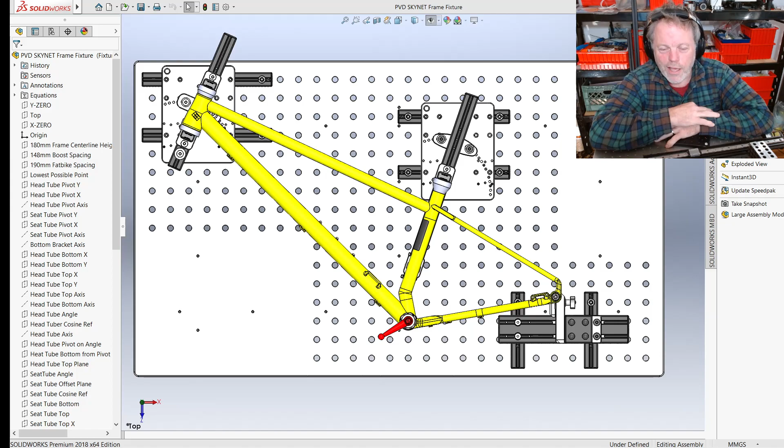You start getting a different perspective than an influencer on YouTube or some guy on a message board that professes to be some kind of expert. So when I was convinced to redesign the Cyberdyne in a way that maximized the ability for, let's say, perfect example is a high school kid with maybe some access to a manual mill and manual lathe and not very much experience using those tools and not a lot of money, which in a way could describe almost every budding frame builder.

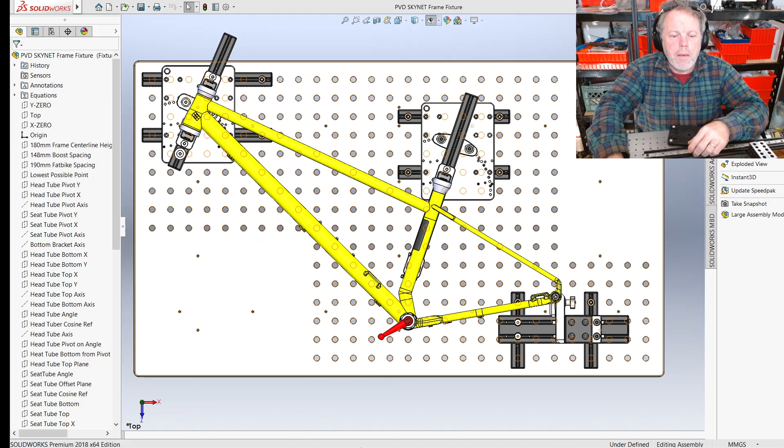And so how would we solve those problems in a similar way? Well, my general advice in the current era for anybody is invest in a welding table, a proper fixturable welding table. It is by far one of the best ways to spend your money if you're looking at entering in this world, just because it can be leveraged so powerfully in so many different ways and it's extendable in so many different ways. So that's a real wise place to spend a lot of money. But a lot of people can't do that, and I get it.

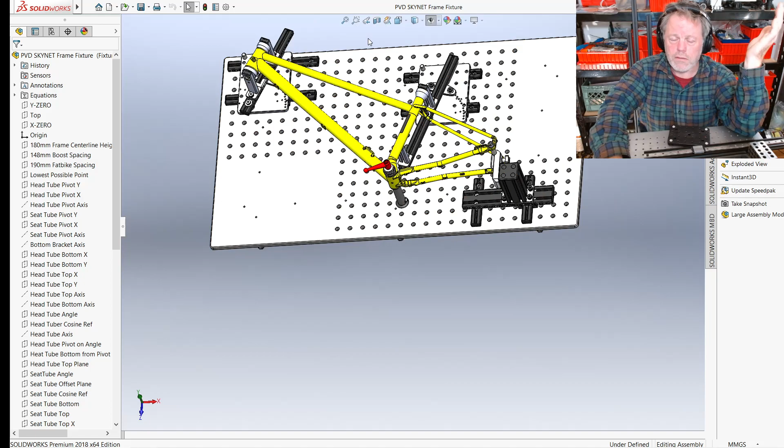But what they might have access to is a wood shop or a sheet of MDF from Home Depot, and they can make a torsion box with MDF. Here's some 3/4 MDF, and it's been cut with a raster, let's say on a CNC router table, which those are fairly common in small towns even. Maybe you got to do a favor, get access to one, but you could lay this out and do this by hand, and it would still be pretty darn good compared to some other fixtures. Just some basic cutting of wood and gluing together will produce an approximate equivalent welding fixture if you're broke.

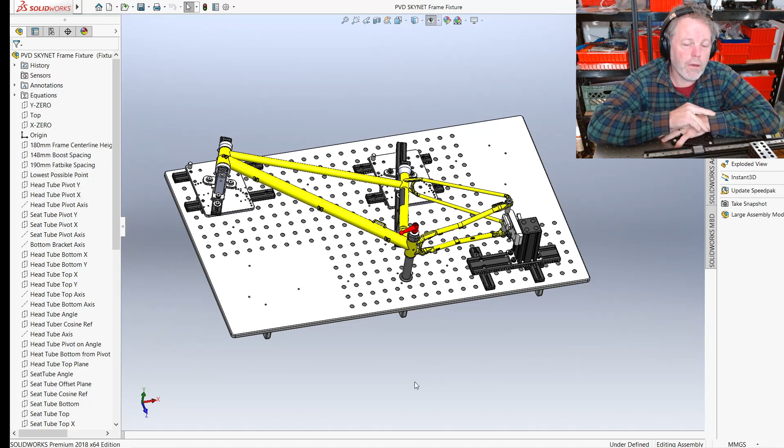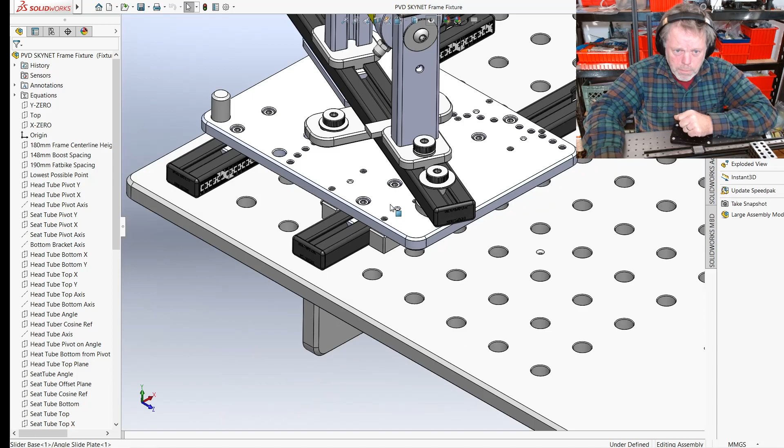Okay. Now, I did this after the Cyberdyne, so I'd learned a few things. One of them was I wanted to get away from the pinning out of the positioning. I wanted to slide. So, of course, we go to 80/20 first, and we like 80/20 because that's exactly what it does well. But if we're going to bolt down some 80/20, we need a way to position it. Let's open up this rail here. Perfect example.

Are we recording? Yep, we're recording.

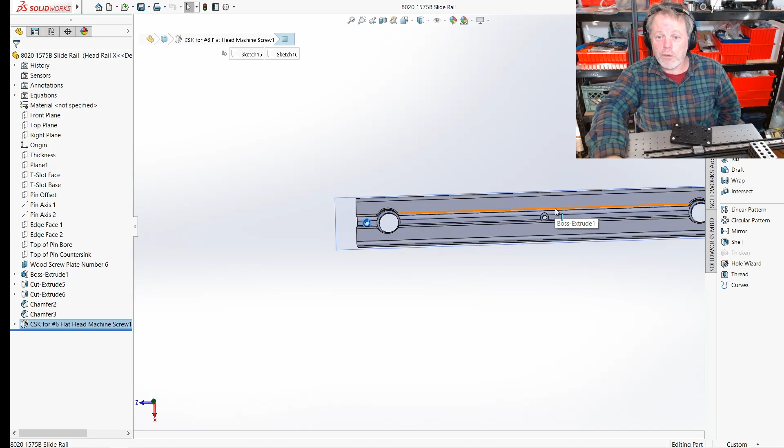Okay. So if you notice here, I have wood screw holes. So if you're just going to be gangster AF, you could just cut some 80/20, put some wood screws in there. You clamp this thing in position and you double, triple check that it's confirmed and it's good. You can just screw this down and boom, you're done.

In fact, you could do it with a whole length and do your seat tube and your head tube with one bar each, so that was effectively going to be your horizontal datum. And that's one way to quickly fab in some just dead nuts precision. But be careful. But it can be done. And so then you don't even have to do the raster.

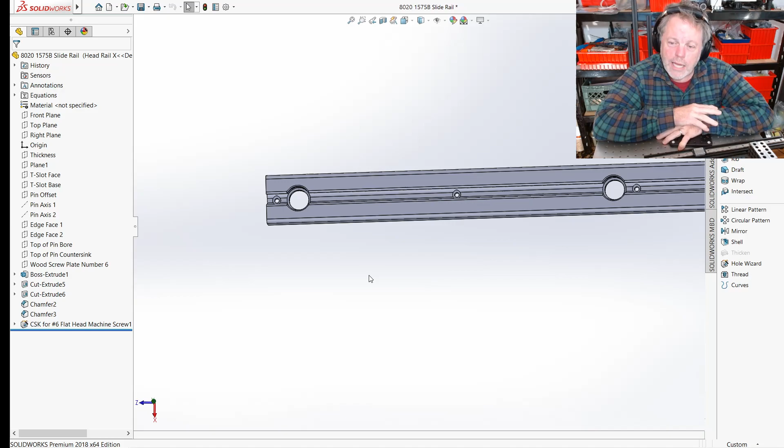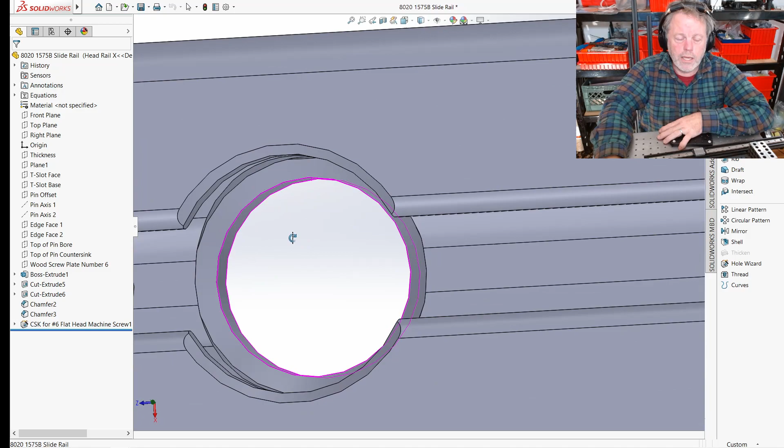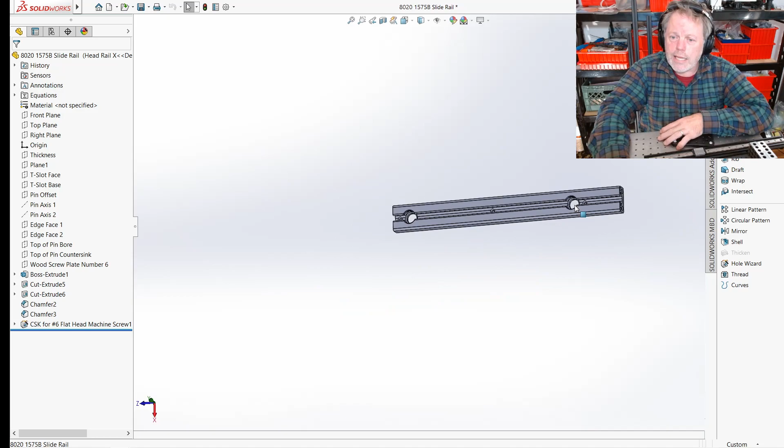You can just bolt up a few rails and a hole for the bottom bracket. You've got yourself a frame fixture with some 80/20. But anyway, I engineered these holes into the 80/20. They're 3/4 inch diameter and 5/8 through, and they're machined with a 3/4 inch chamfering end mill. So you immediately get that 45-degree chamfer there, and that essentially replicates what the top of the welding breadboard is like. And in cahoots with those pins that I talked about, let's not change anything.

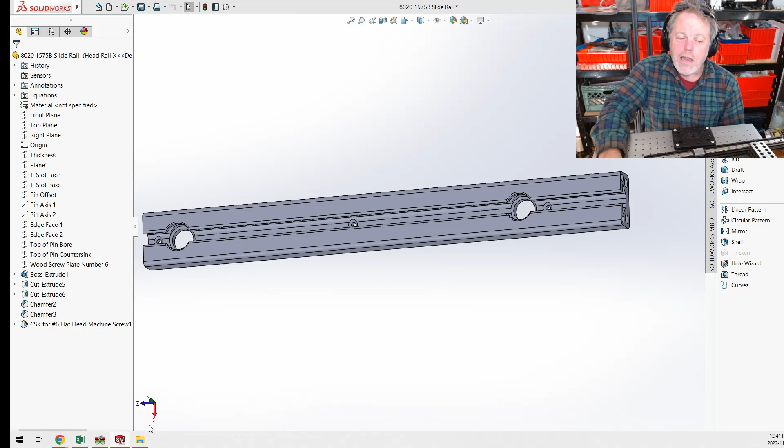Oh, by the way, the bike on this fixture currently is the MiG 31, the Firefox. That was a short-lived bike. That's where we discovered how thin you can print, or how thin you couldn't print. Anyway, it was pretty until it wasn't. What happened? Okay, there we go.

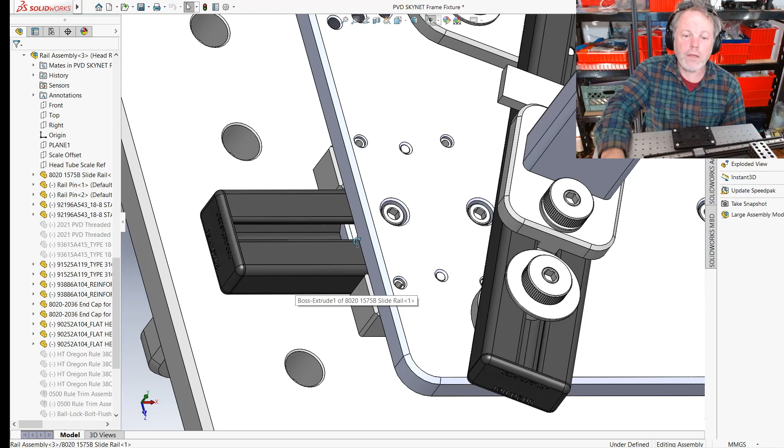So yeah, so then there's these pins that you have to make, and this is the fussier part of this construction. Where is it? Oh, it's on this side. Come on. Oh, they're on the rail assembly. Let's get into the rail assembly. There we go. That's how we should have done this from the start. Just open up a rail assembly. Okay, there we go. Much better. So yeah, there you go. You can see the wood screws, all great.

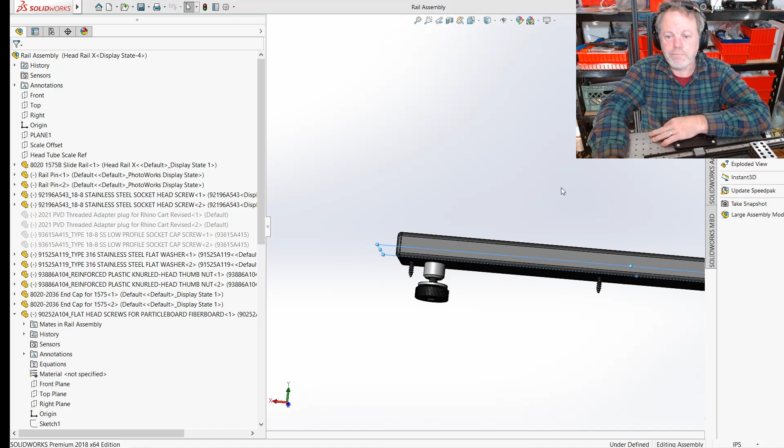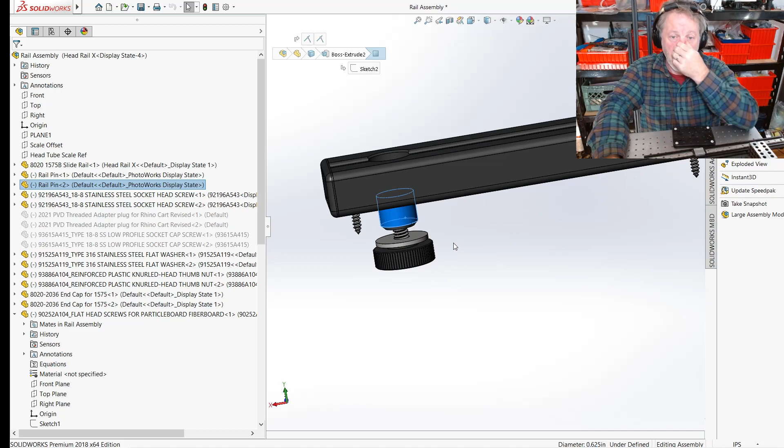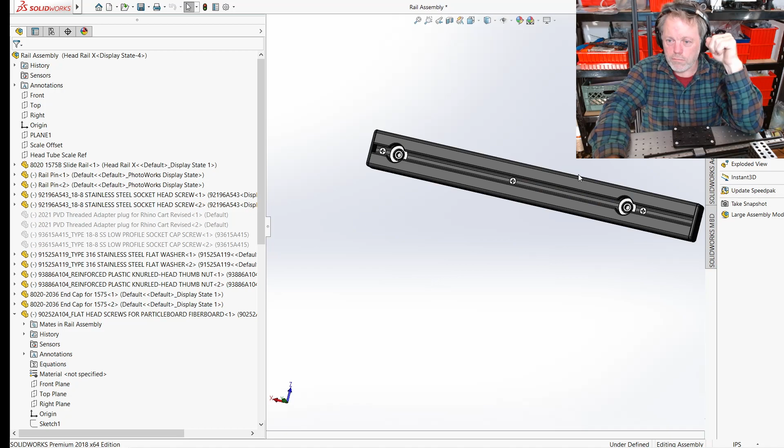But then if you're using a raster, if you're using a weld table or you've made a raster on an MDF torsion box, you can get these pins made, which you can make on a manual mill. They're not too hard to make. I mean, sorry, on a manual lathe. And it's just a countersunk for that. It bolts that down, and you can move that around anywhere on a breadboard now. So that's probably the toughest thing about this fixture, is getting these pins made, which I don't think is too hard. And also people could group together to make pins, that kind of thing.

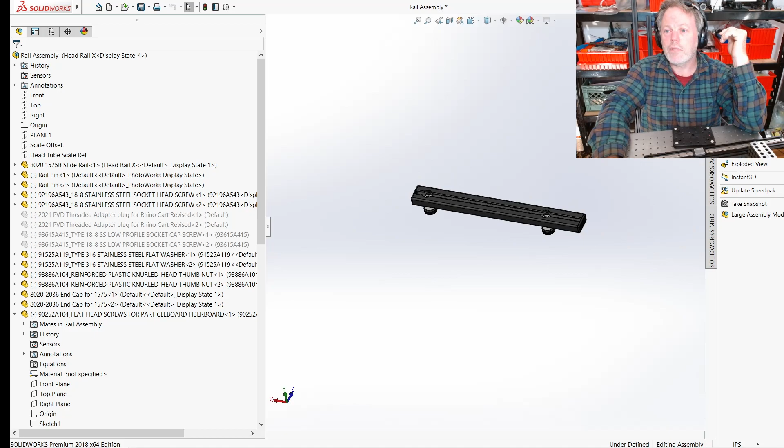But you can also see, boom, screwed down some screws, and these are special screws for particle board. What is it? This is the McMaster number down here. Flathead screws for particleboard or fiberboard. Throw some glue in there if you're going to make a permanent thing. So that's cool. I just hid that plane, so I'm gonna save it so it's just out of our hair. Love playing with the rails. Woo-hoo.

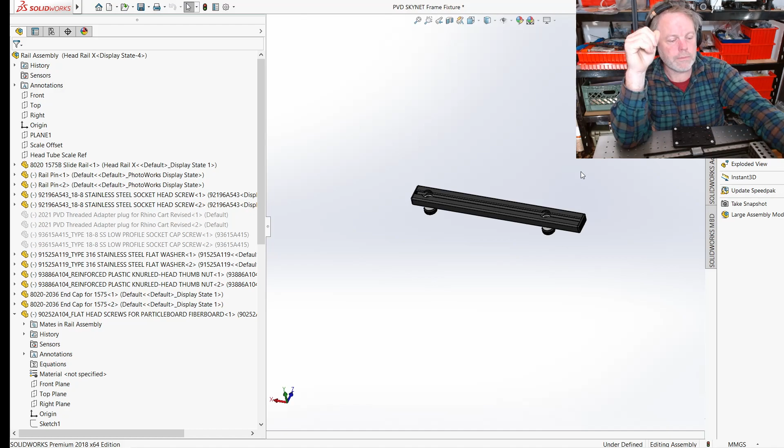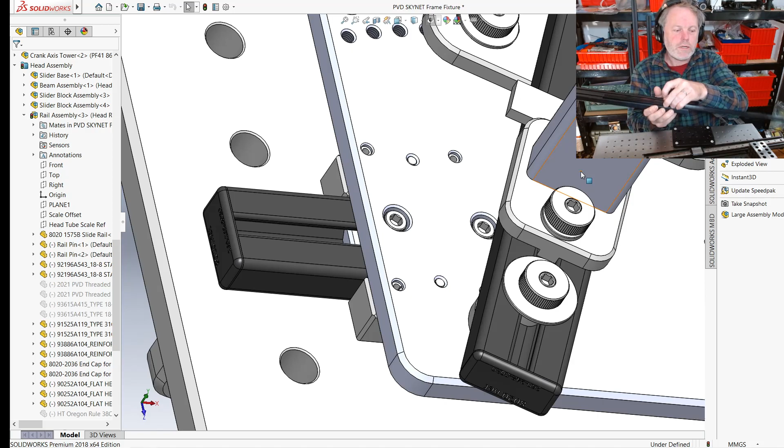So some people are going to be wise and they're going to say, hey Pete, why didn't you just use 80/20 rail stuff, motion stuff? So here's a piece of 80/20, and I like the low profile stuff. I think it's nice. You get the heavyweight stuff too. This is the bearing material that they sell with their stuff, but if you notice, it's got significant play in that. Now, worst case scenario, you could use that, but it's not that great. I mean, they have motion control parts.

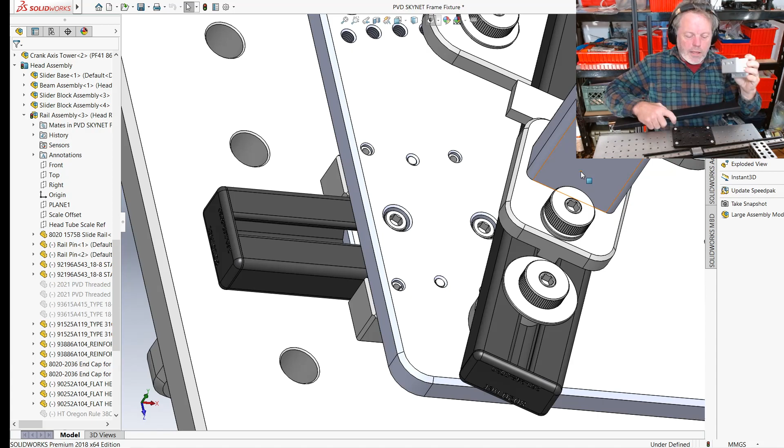There we go. So here's an 80/20 motion control type thing. But I don't believe that these produce the precision we're looking for in this environment. You could end up making something that used it, but I don't think that's wise. Anyway, so I make my own system. Let's open up this angle plate that's largely a piece of aluminum plate with a bunch of holes drilled in it.

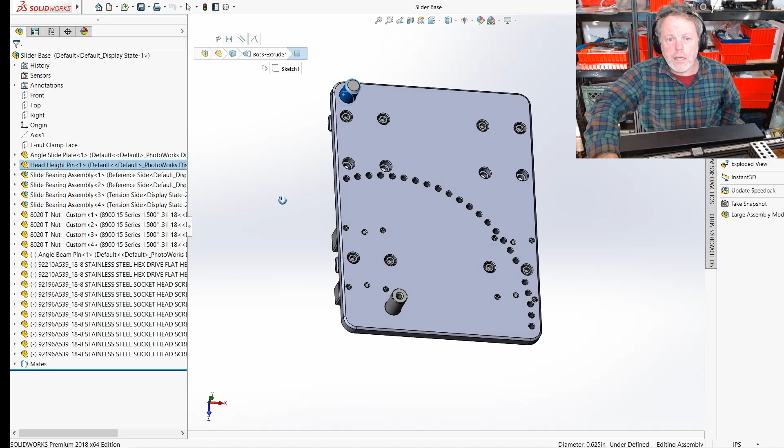Okay, there we go. So because we don't really have the thick material or the CNC stuff, we set our clamp down angle stuff down here. This isn't for precision placing, this is just for clamping. We still end up with a cosine bar made by that pin, but we're sliding along the 80/20 using these. You can get a full length of key stock. Here we go.

So you can make custom T-nuts with this. I say order length. You can get individual pieces, but if you want to stop a lot of racking, doing a pair like this is good. They sell cheap plate ones and everything like that, but if you can, make them out of the proper stuff, and you can buy these in lengths when you do your orders. Just don't forget. So that's really the right way to do that. And of course, when I made this, all the documentation was shared online for making one of these fixtures, so you can look that up.

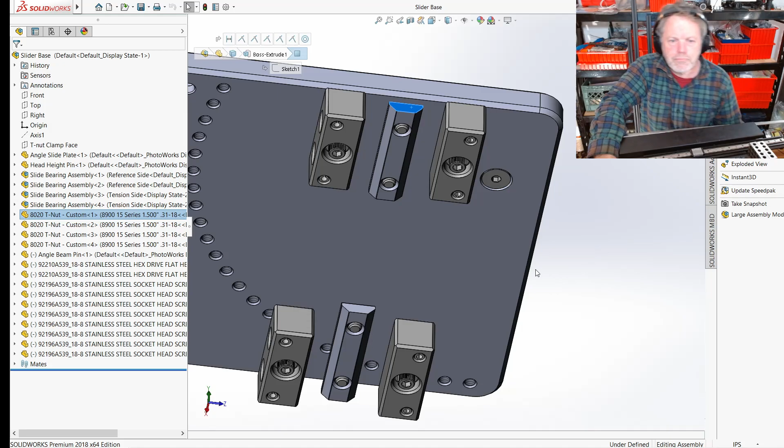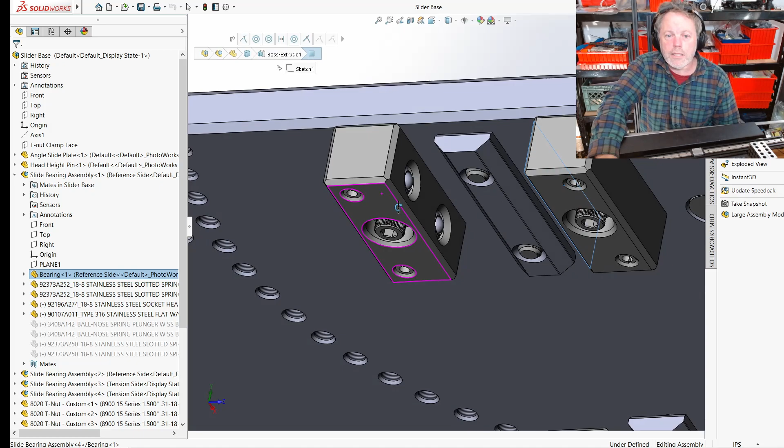Anyway, so I cut some Delrin blocks here. They get pinned in place and clamped down. And that essentially is your fixed datum of the slide. And then on this side, almost the same part, different clearance, but then you screw in a spring-loaded set screw type thing. What do they call them? Let's see for the proper name. Ball nose spring plunger with stainless steel ball.

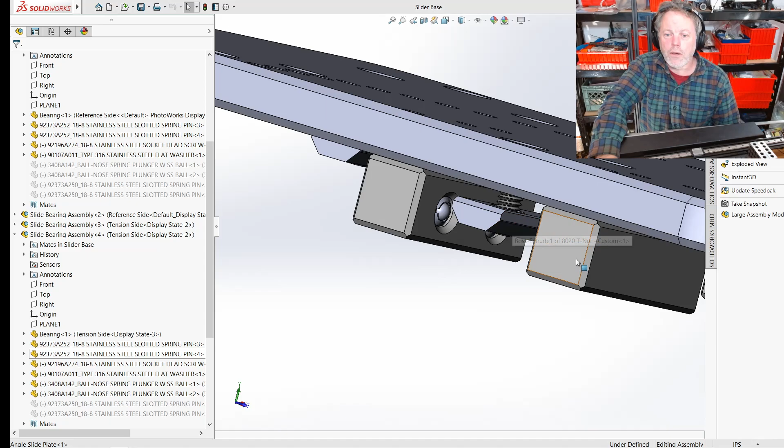So yeah, and all that's supposed to do is provide a little bit of spring tension on one side, because what we want to do is treat this face as our datum for the slide. This clamps it down, this pushes it in the other direction. Worst case scenario, if you overpower it, it bumps up against this Delrin here.

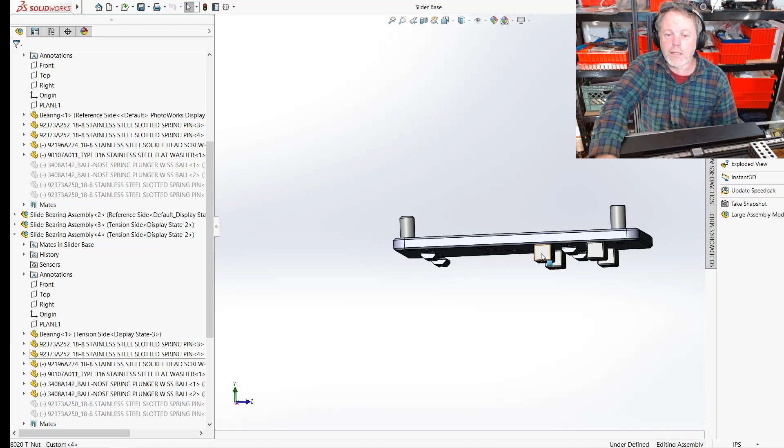Nice and slidey. Okay, and on top, we don't need that because we only need one rail to make a linear positioning, and these clamp. So super solid, and it's all nice, pretty easy to get to. Here's your pin for the pivot, just a counterbore in there, and then you're in business. So not a hard plate to make, and that was pretty cool.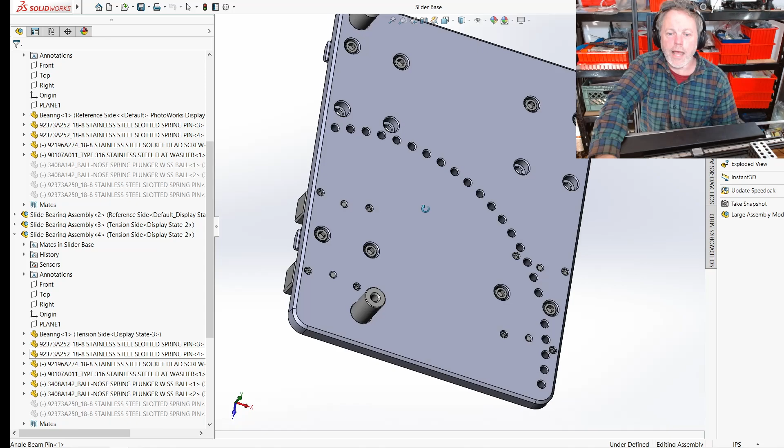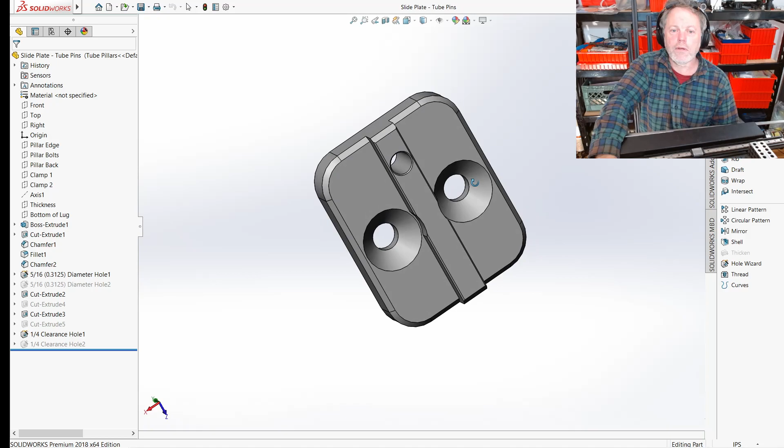I mean, it's a real job, but I think a novice could make it if they have a DRO, especially. And make a little cart for on top of the 80/20. These are fairly simple parts. The SKYNET 2 gets some really fancy versions of these because that's a different thing. Anyway, so there you go. Pretty simple way of tracking on an 80/20. There are other ways of producing precise movement on any 80/20 rail, but this is actually pretty darn good.

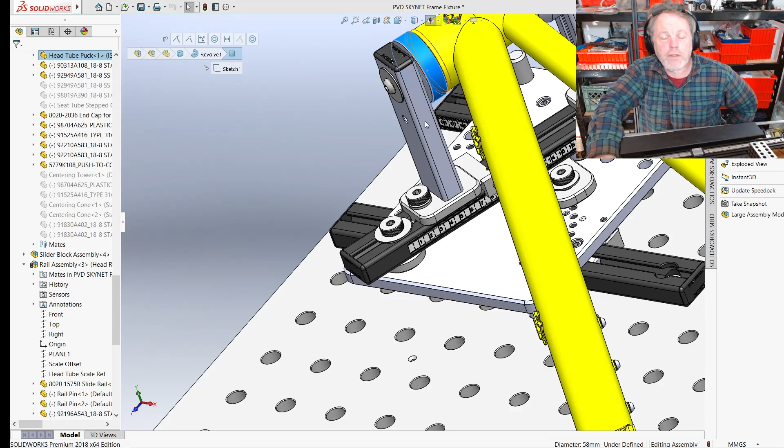And we just pin out. And of course, on this design, and this has been improved, that's the problem with this SKYNET, it is highly improved on the next one. These pins are 5/8. Remember, was it the last video I said, if you spend $1, you want to get $1.50 back, not 75 cents? If I'm going to make a puck, I want it to drop into my welding table too, not just my fixture, because there may come a point where that's a setup that I might want.

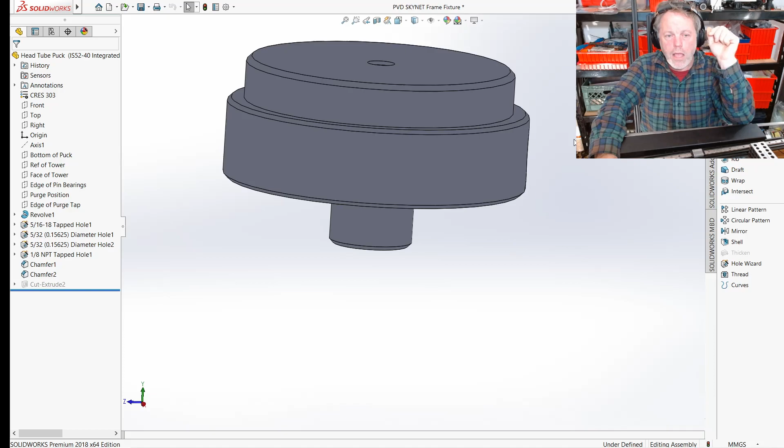So I'm looking forward to future setups of like, hey, wait, something has to hold this. Why not make it 5/8 or 16 millimeter, whatever you're working with, that's fine. But this can be used in another way, okay? And I think that's a special puck for that. Anyway, of course, I've got the rails on there, some various spacers.

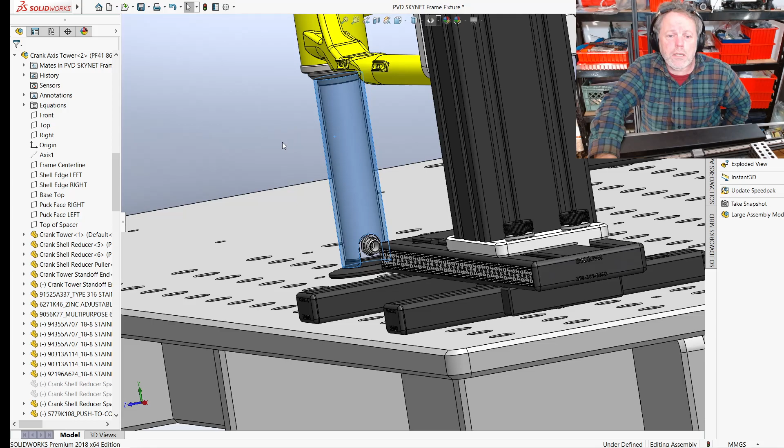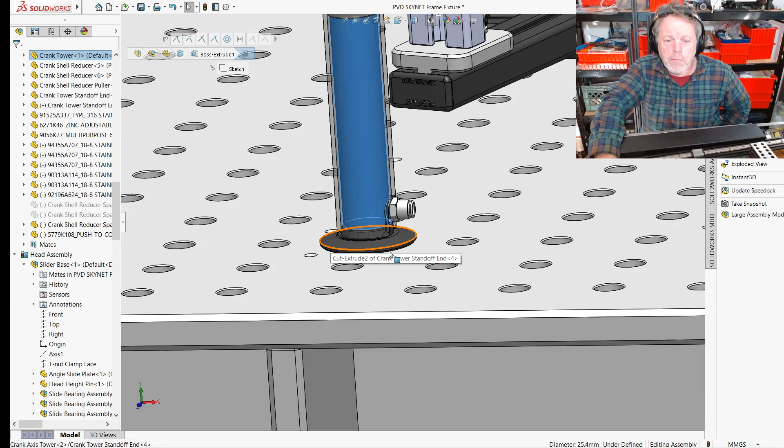It's nothing too complex. To bring the cost down and the ability to machine it, I made this multi-part standoff with some aluminum tube. Let's change the transparency. So this is aluminum tube, and it sits on, and the column itself clamps through this lower plate. Now that might seem like, why are you making it harder if you're trying to make an easy to make fixture? Well, the reason for having it sit on this is it's got a very broad base, and that spreads out the load.

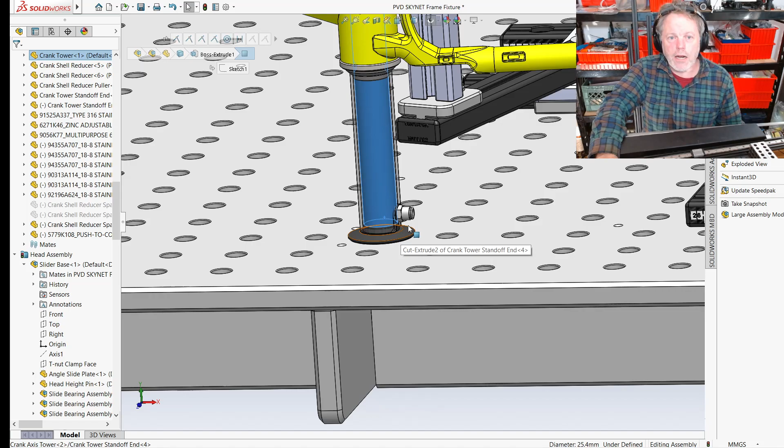So if we're using MDF, we can still end up with an extremely rigid stanchion coming off of that table, and it won't mar up the table if we start really leaning on things. Now, there are limits to what you can do with the MDF, but the whole intention here is we can bolt to a welding table or MDF, and we still have significant purchase down at the bottom. And then, of course, we step up to it.

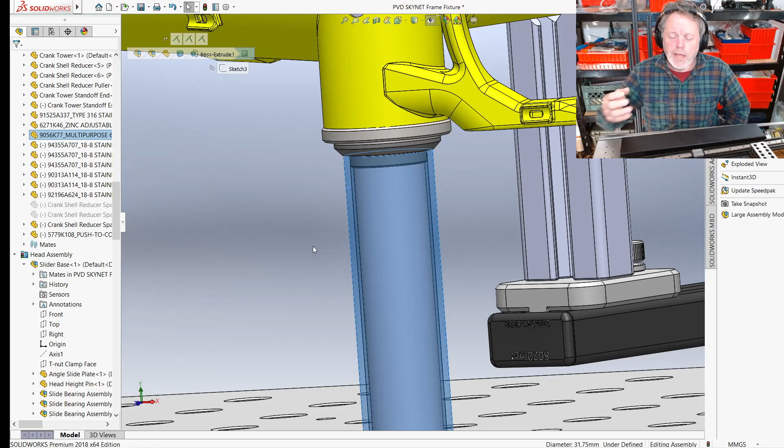But the diameter of this aluminum, and the documentation says, if you can increase the diameter, you should. It's just a lot of lathes people have in common circulation might not be able to hold a through piece of too great a size. So this was kept down to a minimum. I would prefer if that was larger. And then, of course, we're still using 80/20 just to make those V tube holders there.

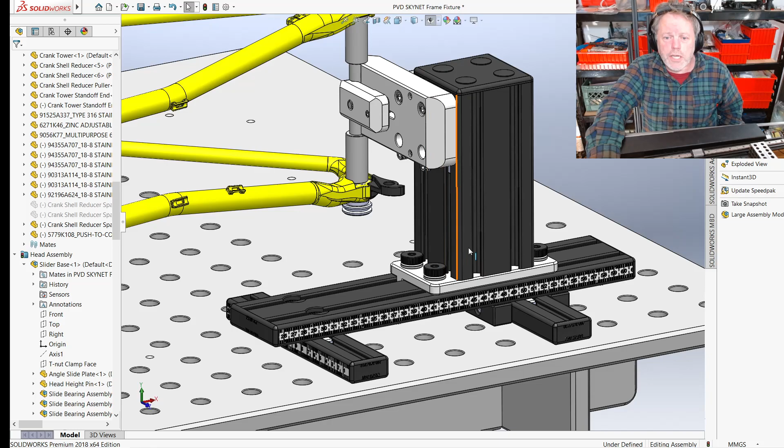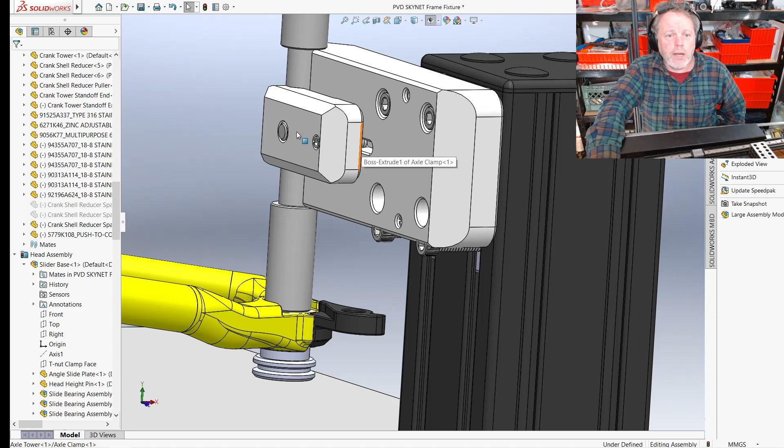Down here, we switched to a 3" by 3" 80/20 column, and then we pin in a bracket that for some reason ended up with the wrong configuration there. I'll fix that later, but anyway, it bolts up. And a nice little release mechanism here, so this clampy doodle stays tracking with a little spring pin, so it slides back, it doesn't wonk out, that kind of thing.

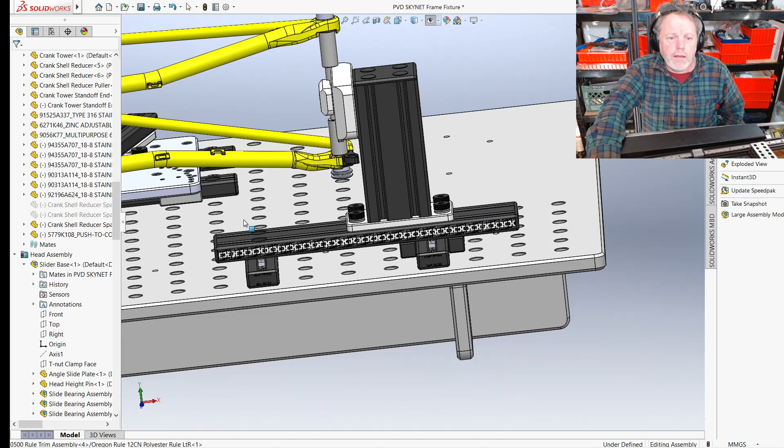Similar sort of arrangement with that spring detent Delrin slide here, and we have a readout here for our position. We reference the edge there for the seat stay position.

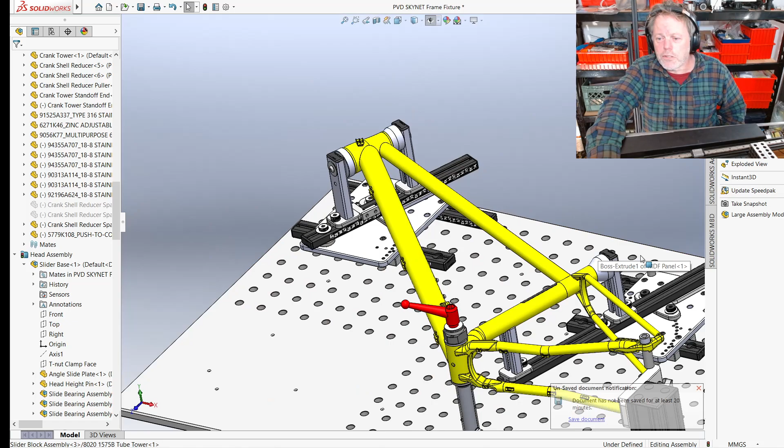I think the head tube probably references here or up here, probably up here maybe. We have a tiny little itsy bitsy machinist square, helps us mark this position. Could probably use it elsewhere. And then up here for the top of this plate, we have that, you know.

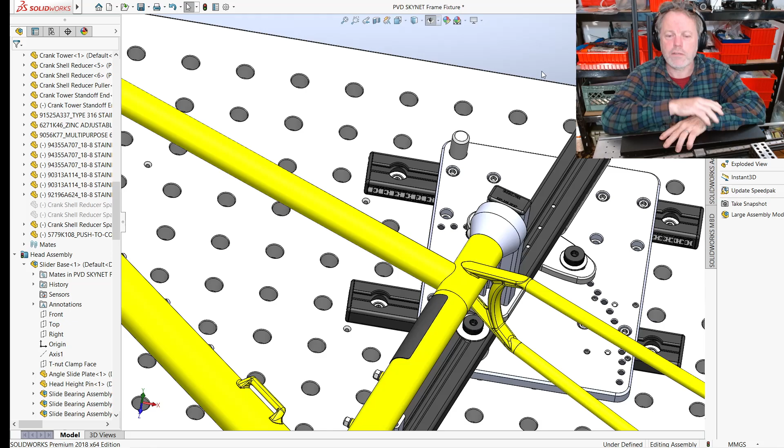And of course, all these scales and these rails can be located wherever you tend to work. Like if you do a lot of work just on children's bicycles, you might have a set of these that are just for children's bicycles, that are in the range for that. And then you might make pro downhill or enduro bikes that are huge, and they have a whole different set of rails just to make it easier on yourself, depending on what you like to do.

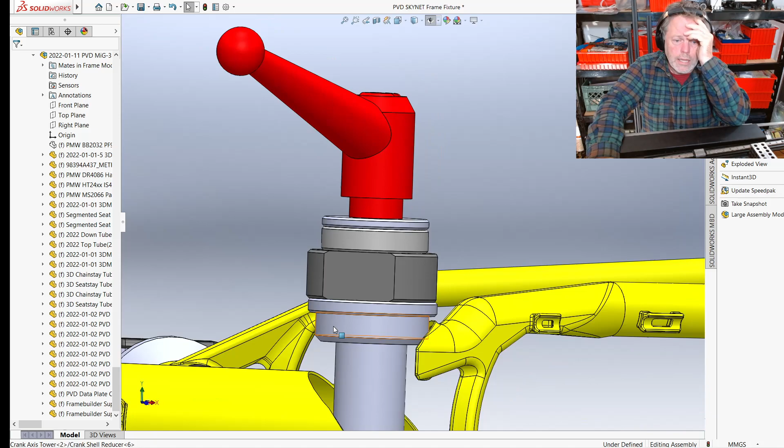Here's an example of that gear puller type mechanism. Now, one problem when I wanted to make this easy for people making it was that cone to cone type setup that I did before. I don't think novices are going to pull that off. That is a little over their heads in terms of ability to produce mating cone angles. Maybe they can do it. That'd be cool. And I make a note in the documentation. If you can, you should.

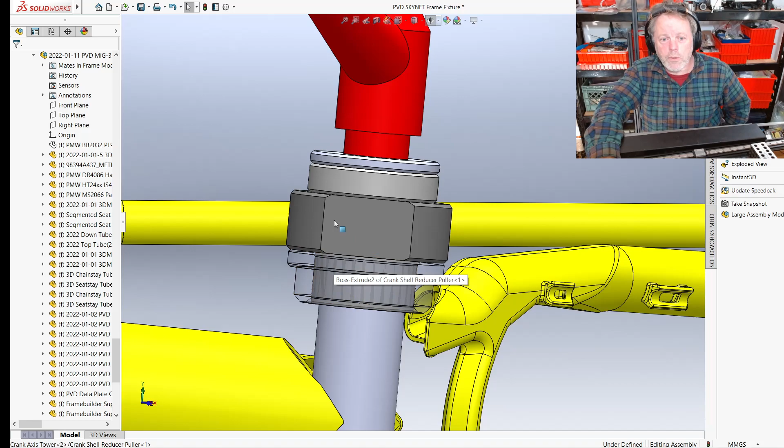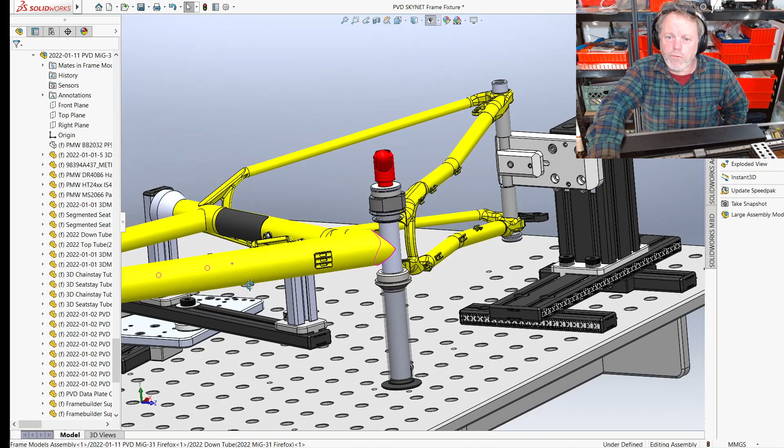But this is a cylinder in there, which, yes, it will bind, but we end up producing this gear puller that we can pull these things apart by making the tool that we're going to need ahead of time. Okay, so that's kind of cool. And again, this is a well-documented fixture already, but we're just pointing out that we solved a couple problems from Cyberdyne. We advanced some of the cause, and this is all easy to make stuff. And several people have produced a SKYNET fixture.

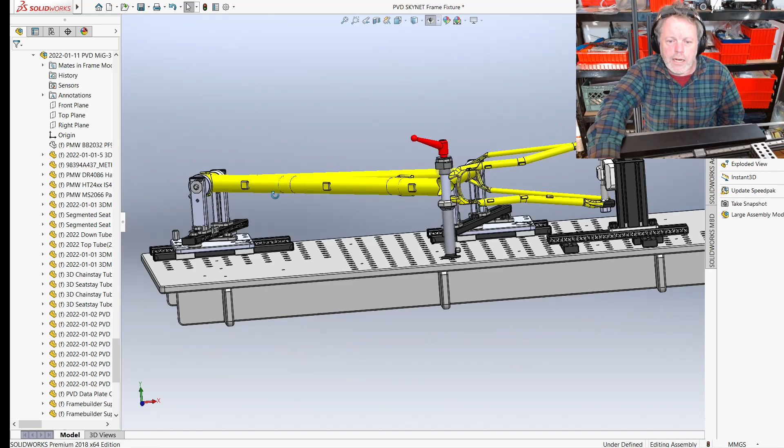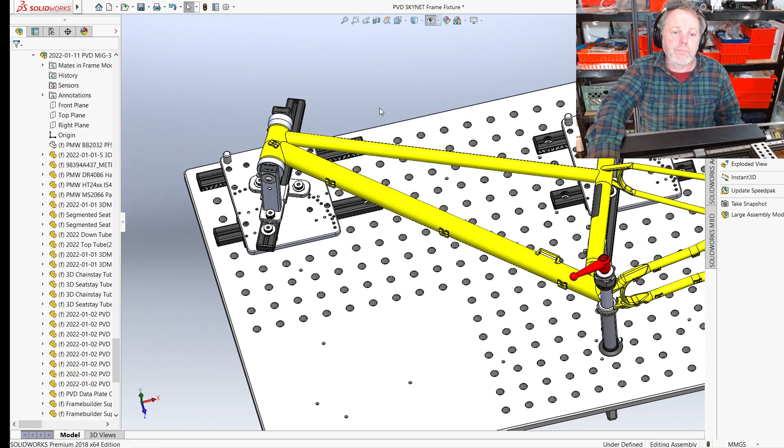It's pretty cool, and just simple enough, making a torsion box, drilling some holes, or just directly attaching. This is easy stuff, and there you go. You could even, if you have a laser or even a router, have all these hole positions marked out in an XY configuration, like a little crosshatch for each one of them, and then drill it on a drill press without having a milling machine. Well, you got the counter bore, so you might have a counter bore tool. But you could get pretty darn close.

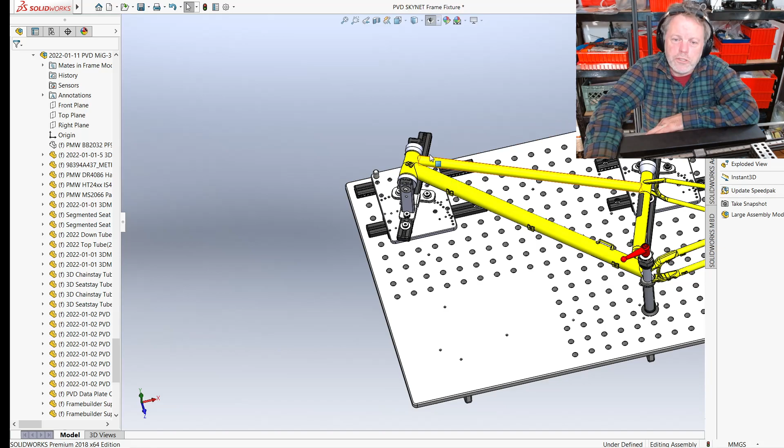And another thing that's really cool about these plate designs is, let's say you produce this up here, this head tube holding area, and you're just a grom and you don't know anything and you got bad tools around you, and you produce some hokey ass crap, and you can make a bike, great. But what's cool is you can come back later and improve on that. You're just improving that one area and fixing that one area. You don't have to make a whole new fixture, you know.

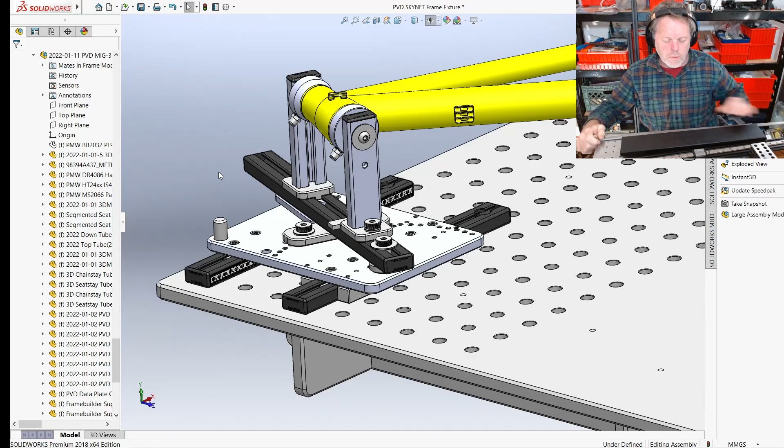And in a way, what's really helpful here is, yeah, some people are going to suck at it when they start, but say you do this plate crappy. Maybe you come back to it a year later and make it much better, because now you're a cool maker, bro, and you make your own bikes, now you're talking to the cool kids and you got a buddy with a CNC mill or something like that. Because that's how life works. Once you get in the game, you start talking to other people that play the game.

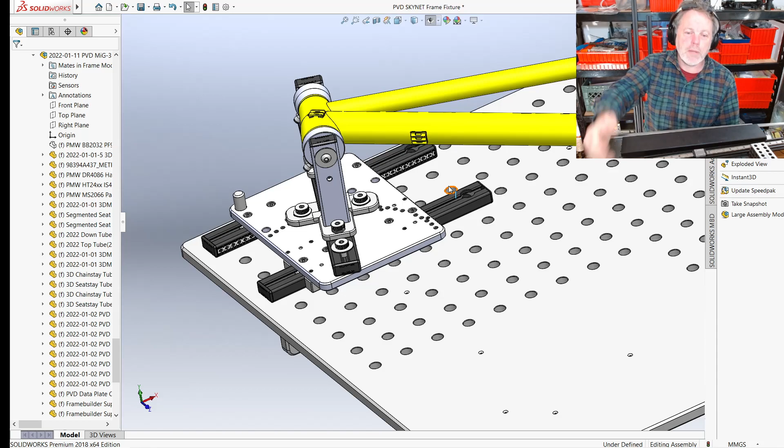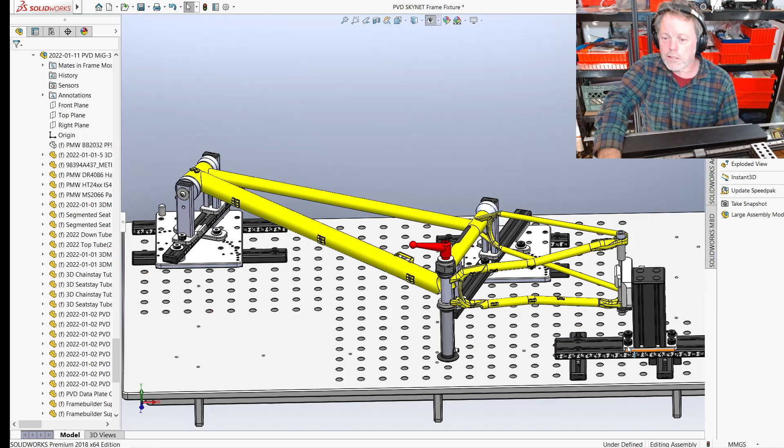And this is a platform where you can slowly improve everything as you go, or your pins sucked and now you know a dude, or you're going to do a group buy or whatever. So yeah, this is a cool fixture. I really was stoked when I produced this, and wait till you see the improvements. Oh my goodness. Okay, what else? Anything I'm missing here? We got a nice little slide, column, blah blah blah.

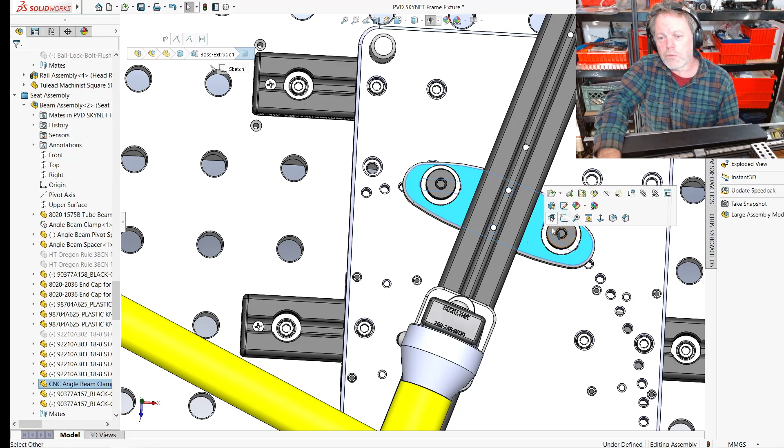Oh, if you notice, I made this. This is for if you have a CNC machine, you can make this nice little clamp with slots in it, because those curved slots are hard for a novice machinist. This will help you make life easier, versus on this side, I can just do X, Y, and we cut that slot at an angle and it's a little looser, but it works just fine. And it's just a rectilinear profile, you know.

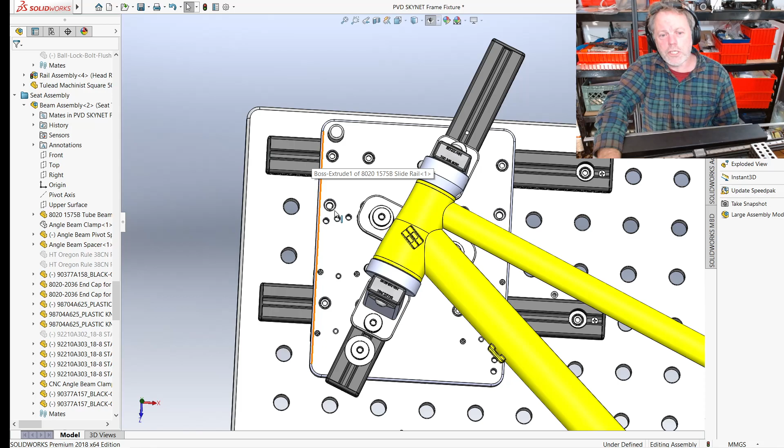Oh, and also this has drilling so that you can close in the spacing. Let's say you don't have the room on your board for a second row up here, you can choke it up down here, which is nice, because sometimes you run out of room. And there we go.

Cool. So SKYNET, that was quick, but in lots of ways it's actually an improvement on Cyberdyne. So that's cool. It gets cheaper and easier as we go. We're developing, right? So we'll talk next about the Whopper, because Whopper was real cool.